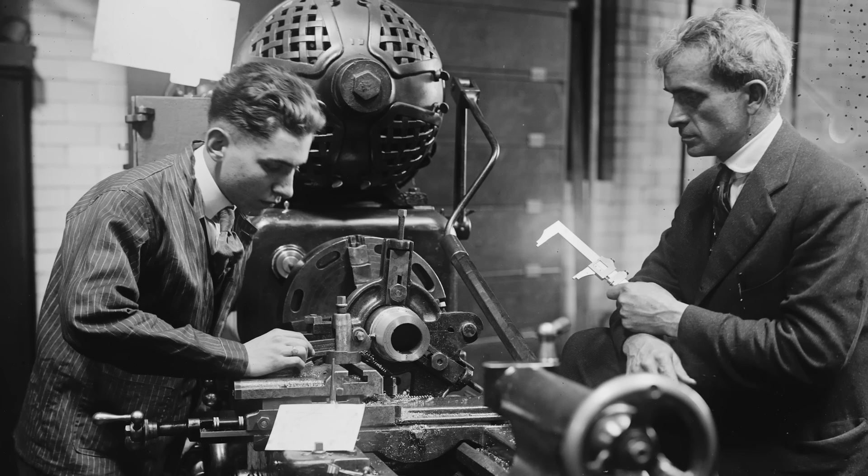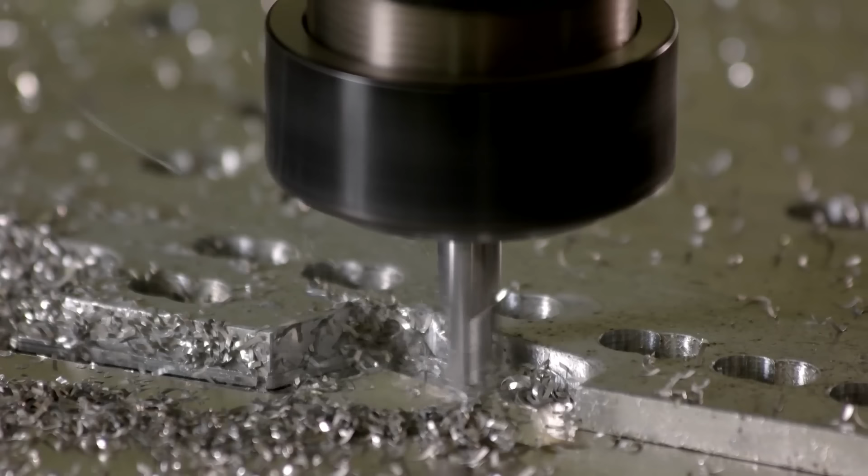The machinist occupies a special place in industry. Using a set of mechanized tools and drawing on years of experience and vibes, they take something from raw metal to finished form. Machining was part science, part magic, a respected craft that brought pride and a good living to its many practitioners. Then, in the 1950s, a revolutionary new technology sought to replace the machinist's capabilities with a string of numbers. One Japanese company arose to take the fullest advantage of this trend.

In today's video, the rise of numerical control, CNC, and Fanuc.

Machine tools are power-driven tools that work metal. There are a variety of them, generally classified into two categories: machining and metal forming tools. Machining tools remove metal from the workpiece in the form of tiny chips. A common example is the lathe, which holds and spins the metal workpiece at high speed while a cutting tool moves around it, cutting it. Another important one is the milling tool, the lathe's conceptual inverse. Here we have a fast rotating cutting tool, and this time it is the workpiece moving around the cutting tool, shaving off tiny chips.

The second major category are the metal forming tools. These units shape metal without removing any of it, most often via deformation, bending, pressing, etc. Such machine tools include forging presses and hammers, hydraulic presses, and so on.

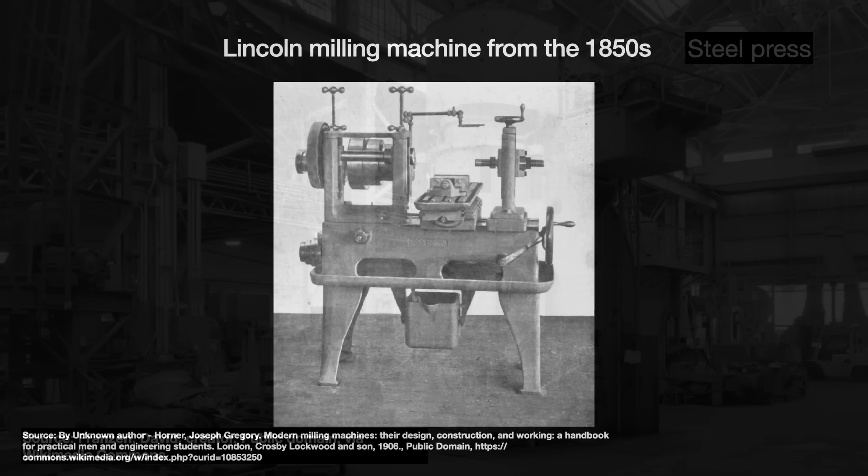Many machine tools first emerged in the United Kingdom and the United States in the mid-1800s for the production of, what else, weapons of war. But the technology and techniques quickly transferred to making sewing machines, bicycles, automobiles, turbines, and the like.

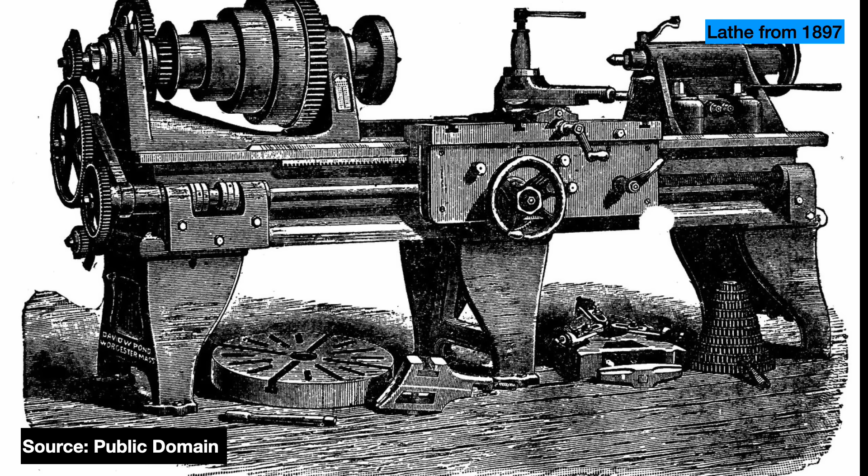Measured by output, these machine tools are nothing. In 1986, the whole American machine tool market was valued at just $2.7 billion, less than the American paper bag industry. But these tools play an outsized role in industrialization. Every manufactured item is either made by a machine tool or by a thing made by a machine tool. Let us give them the proper respect they deserve.

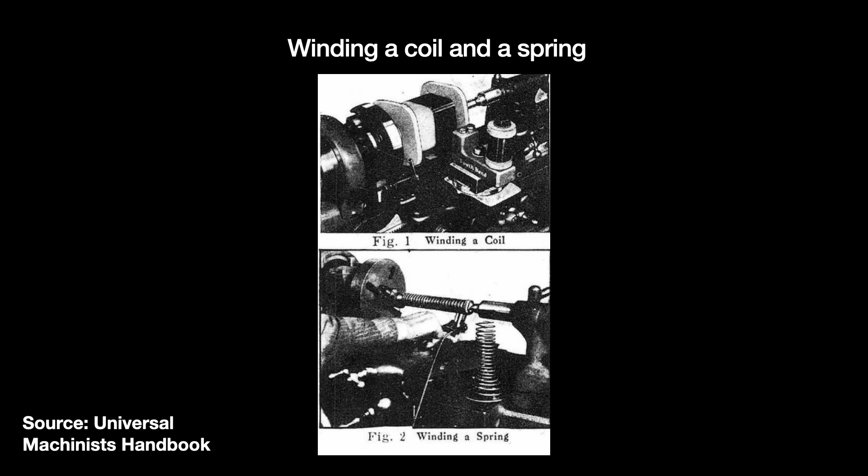For many years, these machine tools were manually operated. It was demanding precision work done by skilled machinists in machine shops, part art, part science. The machinist has to know advanced math, like algebra and trigonometry. They have to grok metallurgy, how to read technical blueprints. At the same time, all that technical knowledge must be augmented with experience, judgment, and just plain feel. Like an artist, they must envision the part before they can go machine it. Such skills must be learned in a real machine shop over many years under apprenticeship.

Machining makes the machinist a key participant in the process. Even if someone else came up with the idea, they must still defer to the machinist's experience. Such control and skill was something that the machinists were very proud of.

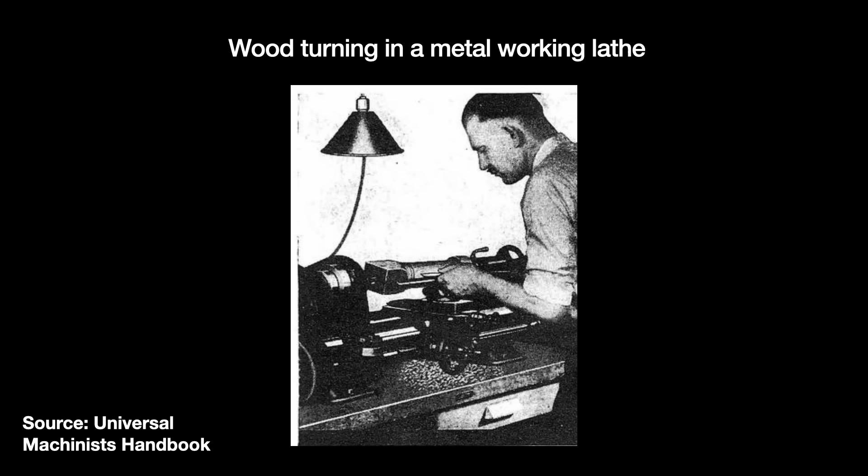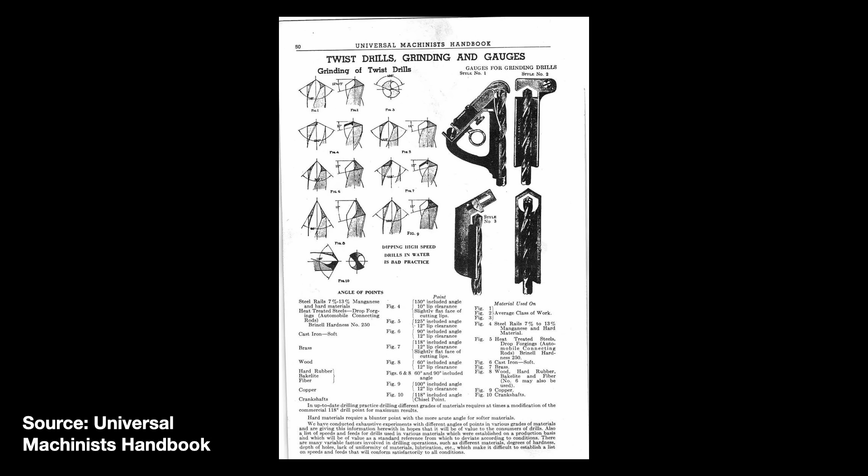Over time, however, industry has demanded increasingly complex and intricate metal shapes. But with there only being so many skilled machinists, it became difficult to produce identically precise machine parts at scale. Was there another way? Thus, the idea of an automatic module, quote-unquote, controlling the machine tool as if it were a human operator.

In 1946, General Electric and the Gisholt Machine Company adapted gunfire control technology developed in World War II to first, quote-unquote, record a master machinist's motions on a milling machine using sensors. The recording is stored onto magnetic tape and then played back with the hope that it can be reused to make many identical parts at scale. It was clever, but ultimately failed. One reason being that the recording was analog, a continuous waveform essentially, so that recording can't be easily edited, and over time, distortions in the tape's quality caused accuracy to drift.

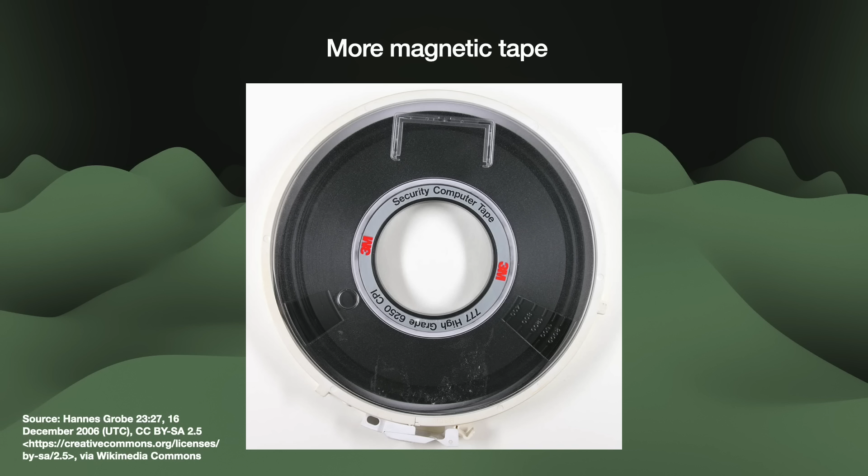Legacy-wise, this particular machine is perhaps most well known today, if at all, for inspiring writer Kurt Vonnegut's debut novel, Player Piano.

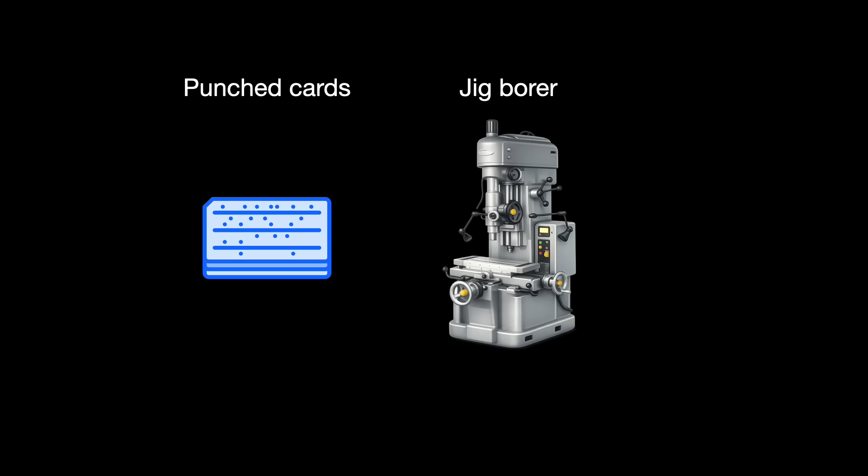In 1948, MIT got a call from an industrialist named John T. Parsons, founder of the Parsons Corporation. Parsons ran a company making helicopter rotor blades for the Air Force, and this required operators to drill hundreds of holes using a machine tool called a jig borer. To reduce operator error, he figured out how to couple a computer to that jig borer so that you can feed it a series of numeric instructions stored on punch cards, coordinates and tool movements essentially. The jig borer then automatically does the jiggy.

Then the Air Force proposed to build a plane with a special wing where the skin and ribs are made from a single piece of metal.

Parsons questioned the recommendation on how to achieve that. He felt that if he could wire up a milling machine to a computer the same way he did with the jig borer, then it could do better. The Air Force said bet, and offered a $200,000 contract to build it.

So Parsons subcontracted MIT to help execute this idea of a milling machine controlled by a string of numerical data on paper tape. In 1949, Parsons, MIT, and the Air Force signed that contract. The Air Force provided a standard Cincinnati Hydrotel milling machine to modify. MIT researchers William Pease and James McDonough led the project.

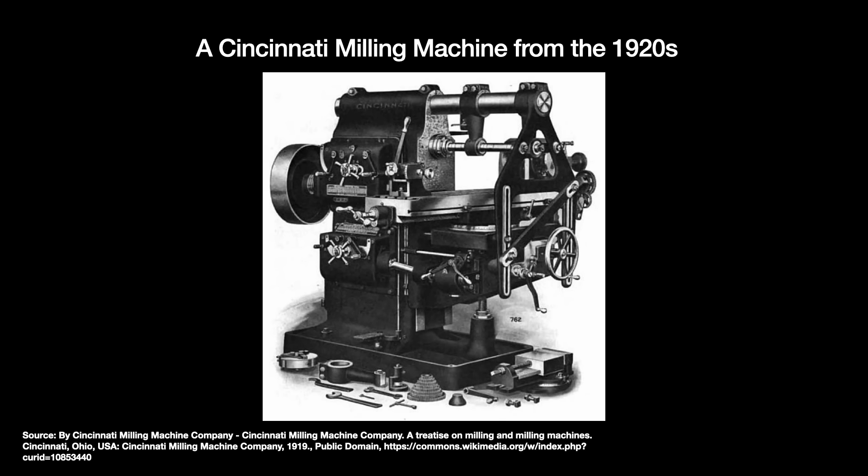The development process was difficult. It took MIT a year to come up with a design that Parsons approved of, and during the build there was huge conflict. Parsons, being the industrialist he was, wanted as few modifications as possible to the Hydrotel milling machine. More modifications raised the budget and made the tool harder to operate.

But MIT was used to working in a military R&D context, where budgets are a secondary concern. And researchers, being researchers, envisioned their project as more than just commercializing an idea - that was just boring. Rather, they saw themselves as tackling the general problem of crafting shapes out of metal. So they replaced the milling machine's conventional controls entirely with 3 hydraulic servos, each capable of receiving separate commands and allowing movement in 3 dimensions. This wayward intellectual exercise apparently, and rightly, drove Parsons nuts.

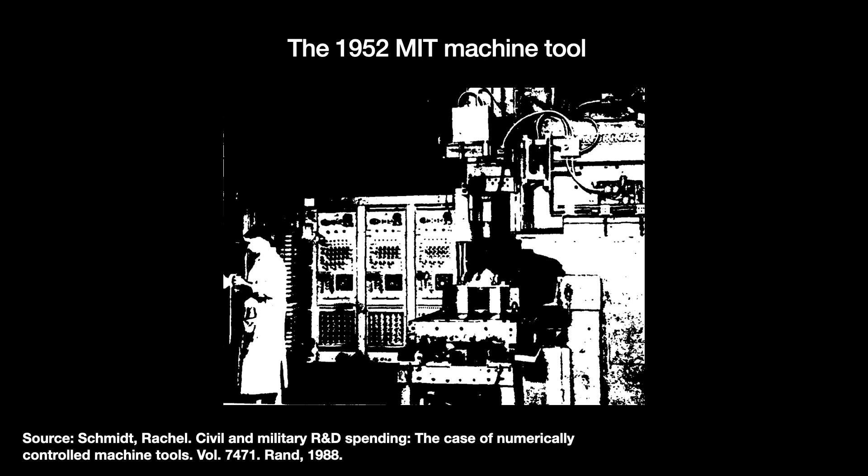After 6 months, the project was just 30% done, but costs had ballooned to over twice the originally projected budget. Financially strained, Parsons withdrew, though he did receive co-authorship on the patent. But the Air Force stepped in, and with their help, the tool was completed 6 months later in March 1952.

Today, we consider the 1952 MIT machine a pioneer. Newspaper articles at the time dubbed it a mechanical brain. In an interview, project leaders Pease and McDonough said that their technology, which they named numerical control, represented a small step towards a new industrial revolution.

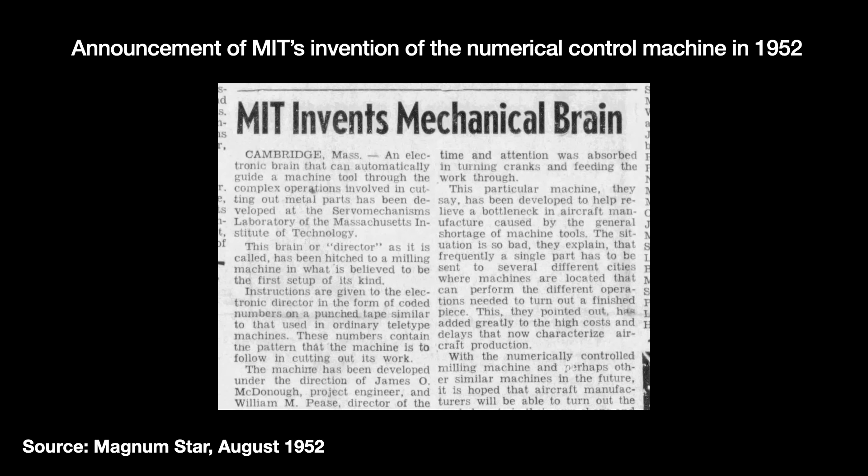After the announcement, MIT held educational seminars and demos to promote numerical control technology to American tooling and aerospace companies. Unfortunately, the reception, especially from the tooling companies, was not that great. A History of the Lab by Kyung-Soo Paik quoted Brown recalling that the demo made one of the manufacturers so mad that he wrote MIT's president, protesting the university wasting resources on such a boondoggle.

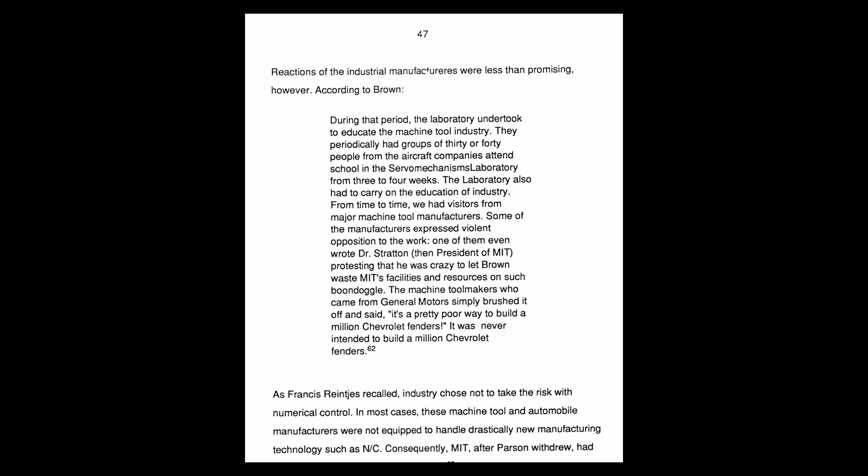Some tool makers from General Motors who saw it brushed it off, saying, quote, 'It's a pretty poor way to build a million Chevrolet fenders,' end quote. Many years later, Parsons said that MIT's demonstrations were, quote, 'ridiculous because they didn't know machining,' end quote.

In the end, the Air Force did adopt numerical control in a major way. They went on to fund, at considerable expense, MIT and 5 companies, including Cincinnati Milling and General Electric, to produce NC controller modules, integrated into milling machines for their aircraft factories.

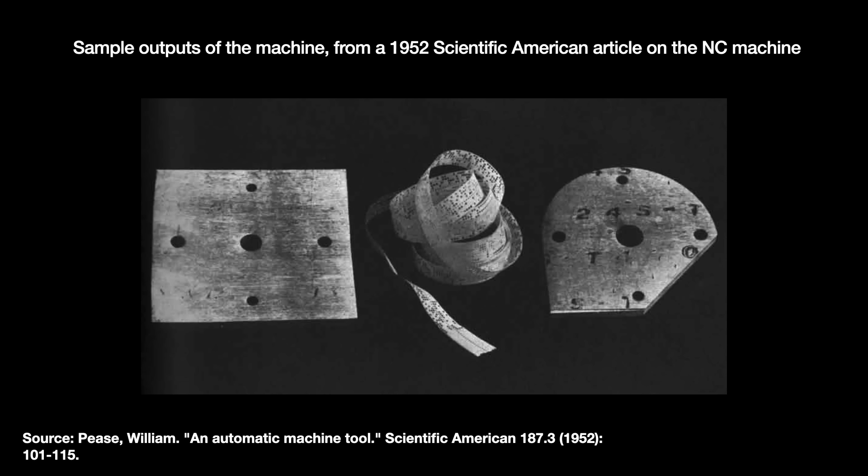Early work was difficult. The modules and their machines broke down frequently on the factory floor due to contamination from electricity, dirt, oil, and chemicals. Operators had no idea how the thing worked and could not fix it. The controller and machine manufacturers frequently blamed each other.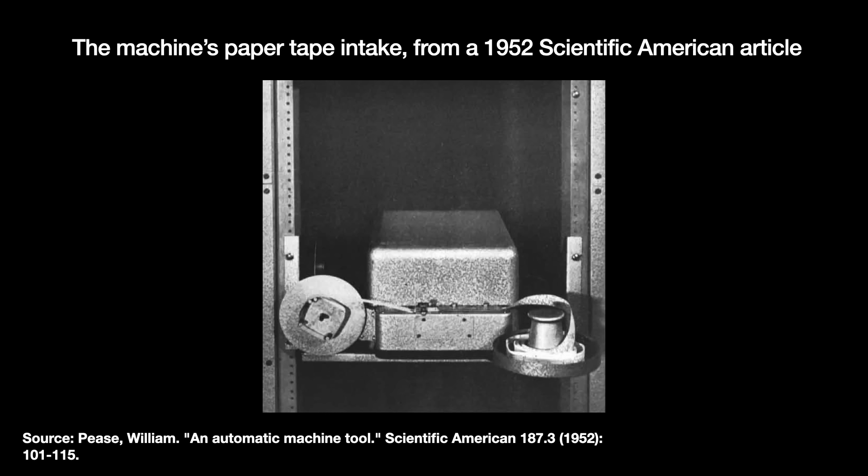The Air Force did eventually get it to work, and the 5 NC controller subcontractors then tried selling their modules commercially. But as none of them cooperated with each other, their systems all worked completely differently. The Air Force had also funded a programming language called Automatically Programmed Tool, or APT, to go along with this NC installation. APT worked and held elegance, but it also greatly contributed to the system's overall costs.

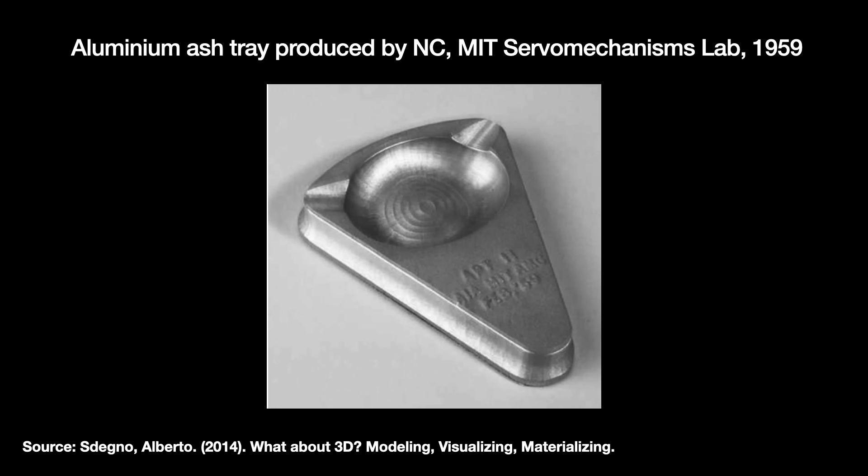Thanks to these efforts, you can say that the United States machine tool industry held a lead in the implementation of NC technology, and there were people, a subset of people, who recognized that NC allowed for certain benefits. However, the long-running connection to the Air Force also left people with the impression that NC was inherently unprofitable without extensive government subsidies - a true double-edged sword.

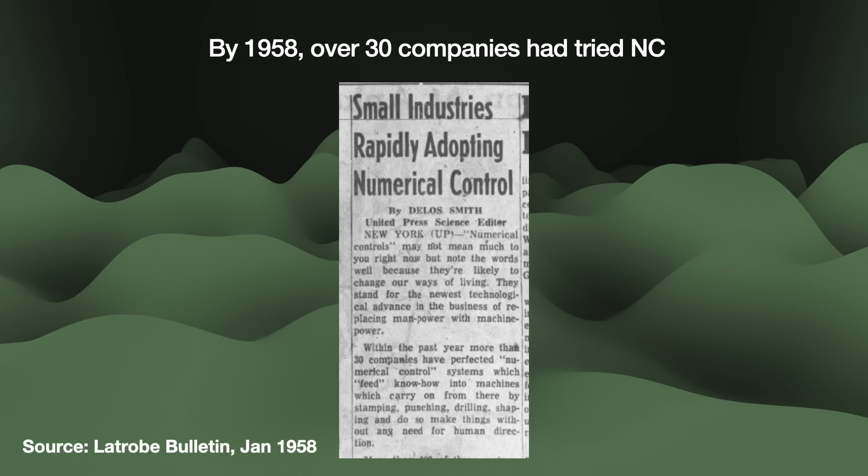But did NC have to be so complicated? Can it be done simpler? Across the Pacific, the news from MIT caught the attention of universities and research institutes in Japan. Soon after the 1952 MIT announcement, work on NC began at the Tokyo Institute of Technology, University of Tokyo, and the Research Institute AIST. This, in turn, motivated the electronics giant Fujitsu to tentatively explore the factory automation space.

They put together a small research team and selected Dr. Soemon Inaba to lead them.

Inaba is described as compact but scholarly looking. I myself might say he's elfish. Born in the Ibaraki prefecture to a long line of village leaders, he apparently spoke Japanese with a noticeably slurring dialect. He studied precision instruments at the University of Tokyo during World War II.

After graduating in 1946, he joined Fujitsu as a mechanical engineer, which made him a bit of an odd duck, because Fujitsu, named Fuji Telecommunications at the time, was more known for computers and telecommunications than mechanical engineering.

Inaba recalled kicking off in 1955 with very little. Quote: 'Development started from scratch, beginning with the acquisition of technical papers from MIT.' End quote. The team then got a fortuitous boost from one of Japan's top machine tool companies.

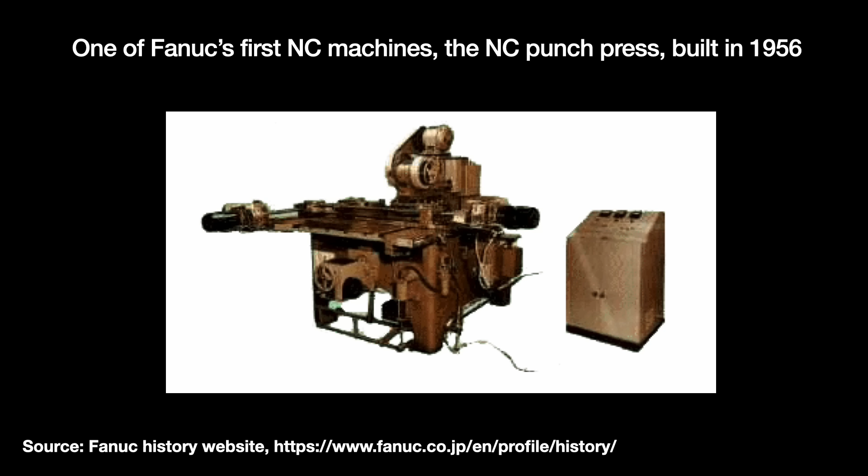Powered by a Sanyo motor and a type of pre-transistor electrical circuit called the parametron, this NC controller module directed a turret punch press imported from the United States. All it did was punch holes into sheet metal, but it was good enough progress to be hailed in the media.

Inaba then turns to making an NC milling machine by the 1958 Osaka Trade Fair. They pull it off, though the tool they demonstrated was not commercially viable.

After the exhibition, Mitsubishi Heavy Industries' Nagoya aircraft factory is sufficiently impressed with Inaba and Fujitsu to commission an NC milling tool for their F-86 fighter jet. Fujitsu, Mitsubishi, and Makino thus collaborate in an all-star event to deliver the first production NC tool in November 1958.

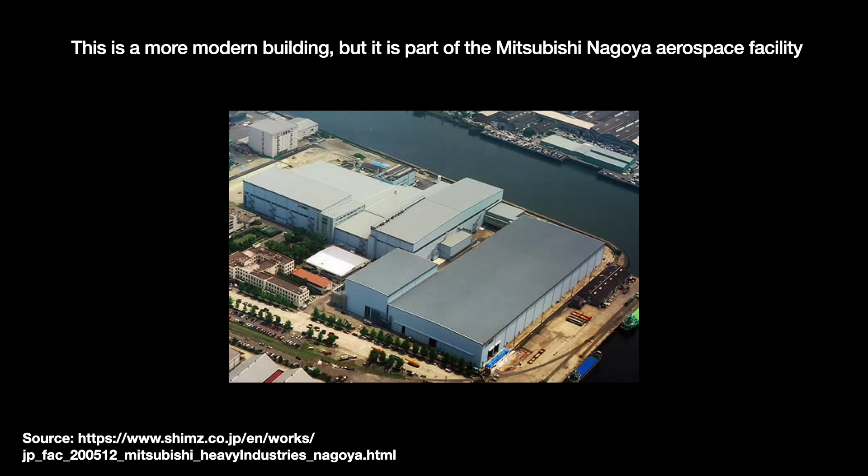This NC tool was just barely competent. It was so sensitive to electric noise that even a motorbike passing by the factory might cause the device to error out, and each month one of its 100 vacuum tubes blew out, which was extremely inconvenient.

In 1959, Inaba and Fujitsu rocketed past domestic machine tool competitors like Toshiba and Mitsubishi with a breakthrough NC-enabled milling machine. At its heart is something called an electro-hydraulic pulse motor.

Inaba invented and patented the motor himself, though he got the core idea from one of Fujitsu's automatic exchange equipment products. How does it work? The name is quite informative.

First, a human interprets the blueprints and produces a list of coordinates for the machine to cut. This is put onto a paper tape, which is fed into a Fujitsu Facom 128 general-purpose computer. The Facom 128 reads the tape and decides the lines and cut paths.

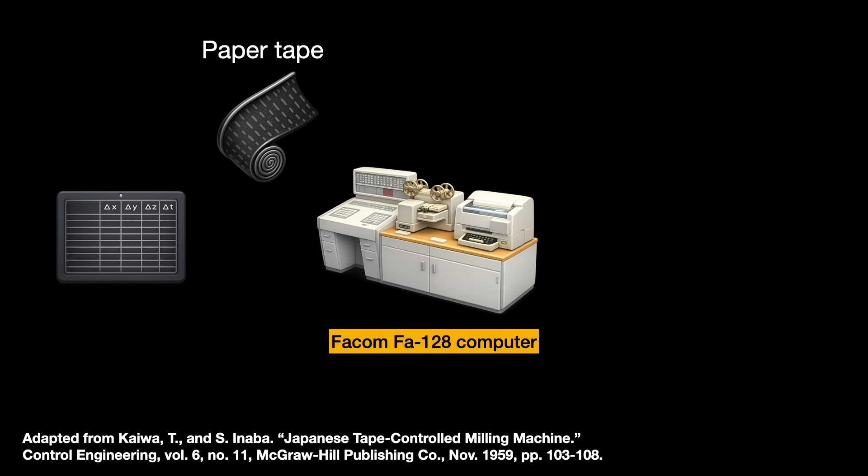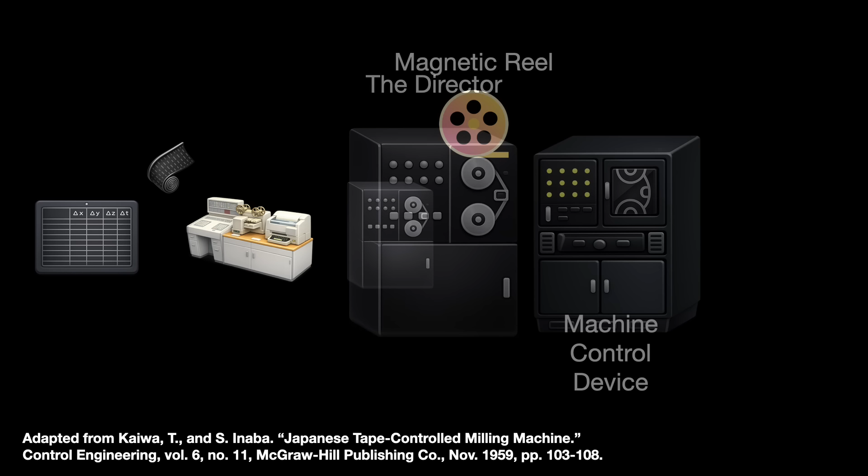Then another thingy called a director translates that information into a sequence of electrical pulses and transcribes it onto magnetic tape. The pulse sequence goes into a machine control unit.

Inside that unit, the sequence controls the flow of highly pressurized hydraulic oil through a special valve. The hydraulic motors thus move a heavy piece of metal along the cutter in a certain direction. Slowly, the pulse sequence allows us to cut the metal into the desired shape.

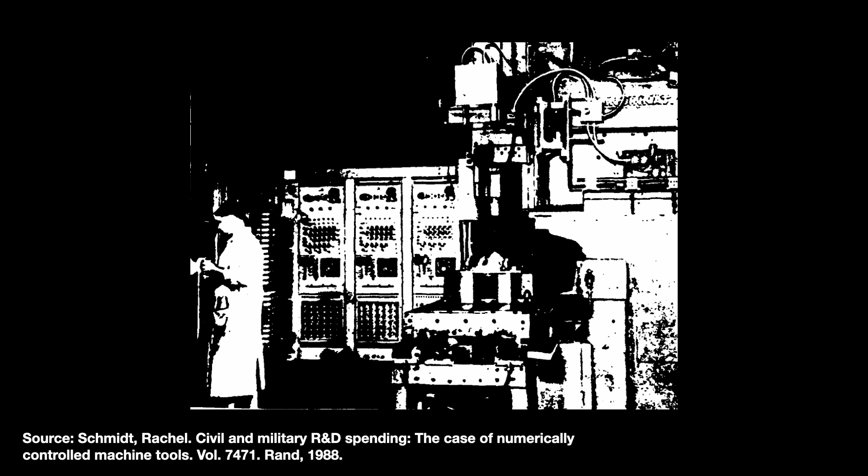Inaba and his team intentionally designed their tool to be simple but practical. For instance, the 1952 MIT machine ran on a closed feedback loop, meaning that it read and responded to its own real-world results, which was technically nifty, but probably contributed to its high cost and impracticality.

The Fujitsu machine, on the other hand, was largely open loop, like a fancy player piano that carved metal rather than jam out Scott Joplin's The Entertainer. This stripped-down version of NC was key in allowing the module to survive factory floor conditions, and it went into the market in 1960.

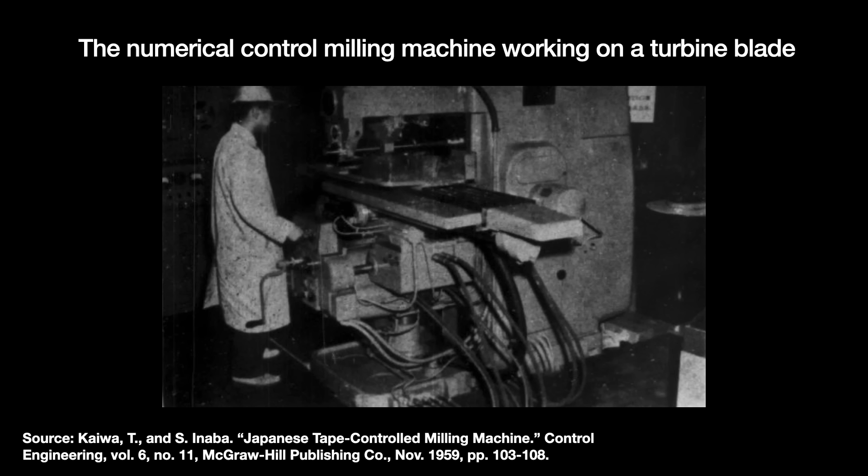After this first success, one might expect Fujitsu to further pursue the machine tool space, but Inaba instead decided to focus his company on only the NC controller technology, partnering with the Japanese machine tool companies rather than competing against them.

Their first open-loop NC controller module, the Fanuc 220 — Fanuc stands for Fujitsu Automatic Numerical Control — released in 1960, but it struggled in the market. Why? Well, first, it cost about 10 million yen, which was more than the tool itself. Second, it also needed human operators to manually tweak the whole pulse sequence to accommodate variance between tools.

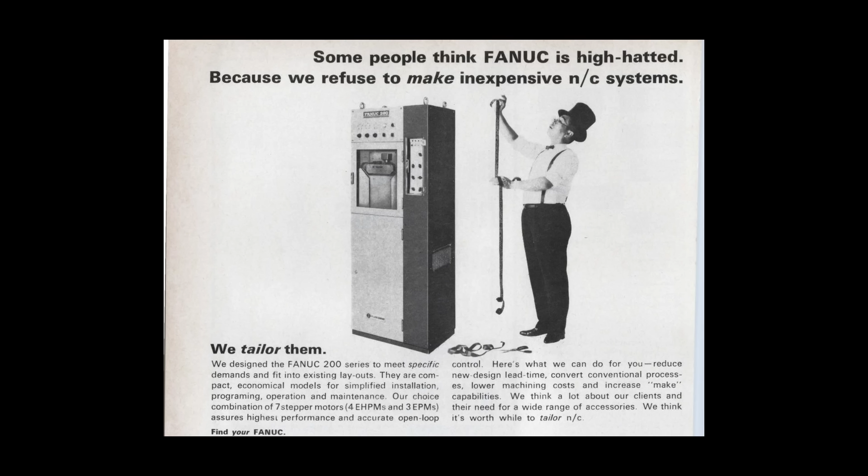Makino suggested an offset function that allowed operators to quickly make lasting offsets to fix any tool variance errors. They also suggested removing a curvilinear processing feature and replacing it with a straight line feature to make it cheaper.

This feature deletion, as well as transistorization, let Fujitsu price the Fanuc 260 controller module at 2 million yen, just a fifth that of the Fanuc 220. Sales surged from 60 units in 1965 to 388 in 1968.

Back in the United States, one of the key drivers of NC adoption was the rise of the machining center throughout the 1960s. An early machining center was Kearney and Trecker's Milwaukee-Matic Model 2. This $145,000 tool was equipped with a cutter, rotating horizontal table, and an automatic tool changer.

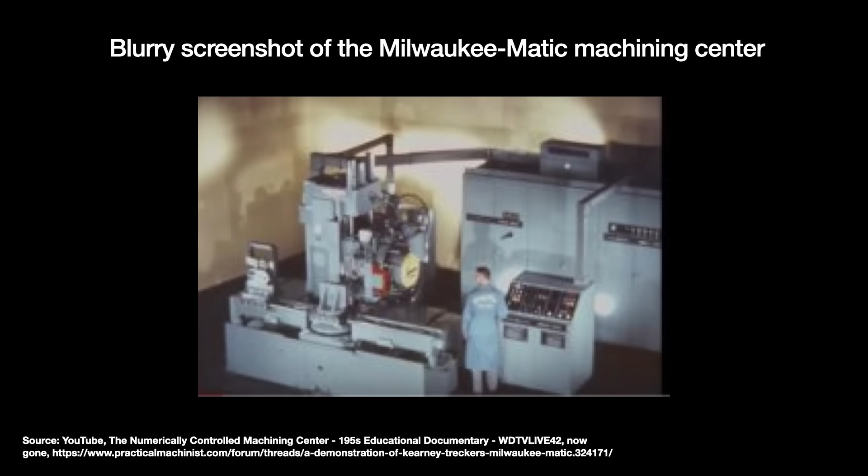This tool changer was a rotating drum holding about 30 tools. When needed, an arm can go and equip itself with a new tool from the drum in about 9 seconds. Such fast, precise movements can only be performed using numerical control.

The NC-powered machining center consolidated multiple machining functions into one: drilling, milling, boring, tapping, reaming, and some lathing, though not too well. An entire production center in one.

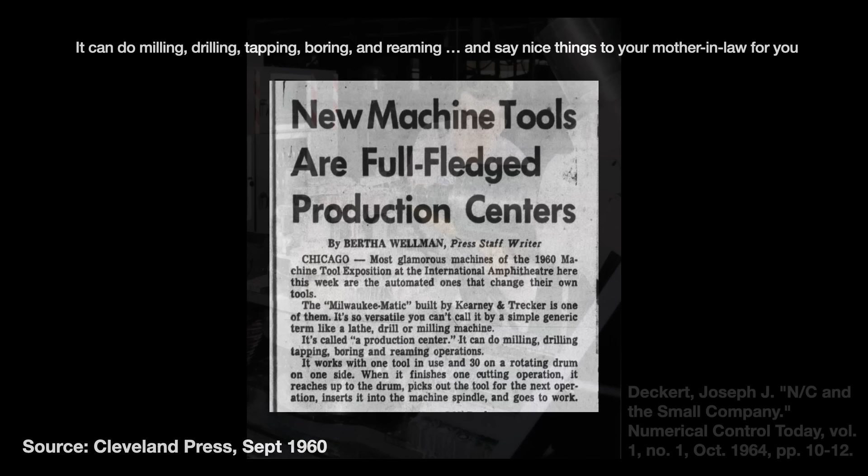The American machine tool industry for decades led the world, and for all those decades, it thrived on machine tool makers building different tools, knowing that they did different things and that machine shops are going to buy all of them. But NC-enabled machining centers leveled and reshaped the playing field, ending niches that once existed in milling, boring, drilling, what have you. So those guys rushed to build their own machining centers, driving NC module adoption and forcing themselves to compete mano a mano in an increasingly crowded space.

But making a good machining center requires new competencies in complicated areas like control theory and electronics. The Japanese tool makers just bought from Fanuc, but many of the American companies tried to roll their own solution with varying amounts of success.

In the mid-1960s, a slowdown in the aerospace industry combined with tightening credit causes the cyclical machine tool industry to crash hard. Sales declined 50 to 60% between the 1967 peak to 1971.

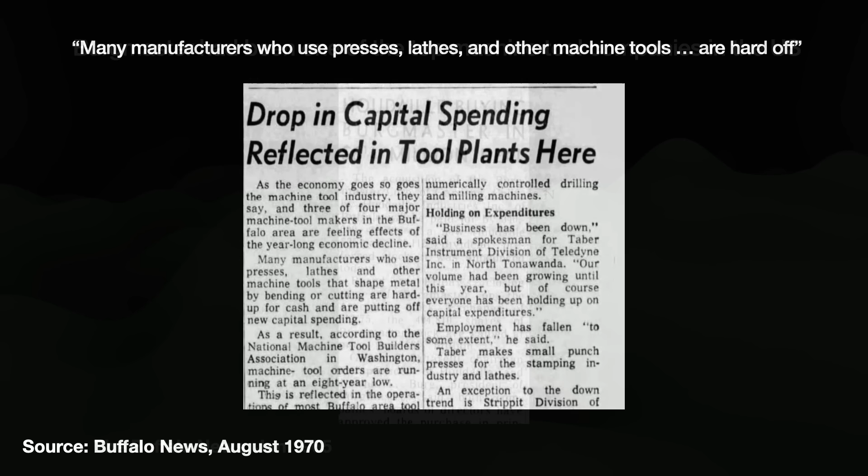This opened the door for financial conglomerates, private equity essentially, to go in and start buying up and merging together these small machine tool businesses. This was detailed in the wonderful book When the Machine Stopped, written in 1989 by Max Holland.

Backed by Wall Street money, these conglomerates paid more than any other machine tool firm, yet they lacked knowledge or even interest about the machine tool industry itself. Companies like Burgmaster often sold thinking that they can tap pools of cash to fund more products. But it turned out that the conglomerates simply wanted to milk the old cash cow so that they can go buy the next big thing.

This starved the U.S. machine tool companies of cash that could have been reinvested into the business, particularly to adopt numerical control. By 1970, global machine tool export share held by American firms declined to just about 15%. The export leader those years was Germany, with about 30% market share, aided in part by Siemens aggressively adopting NC as well as a favorable exchange rate.

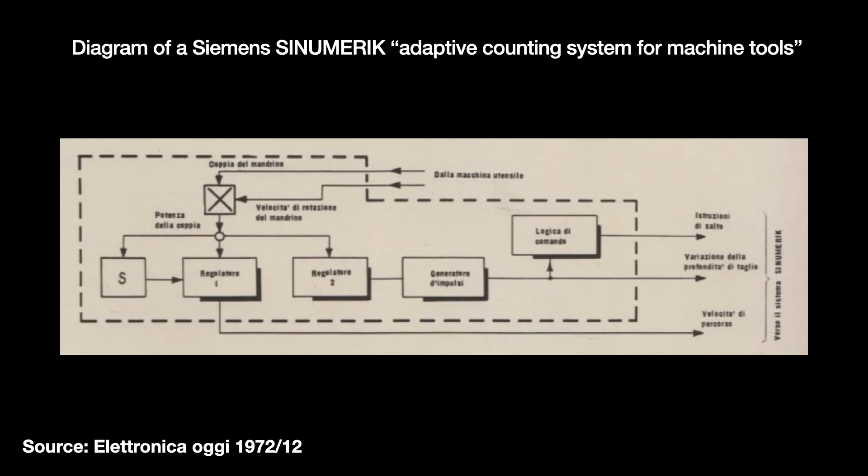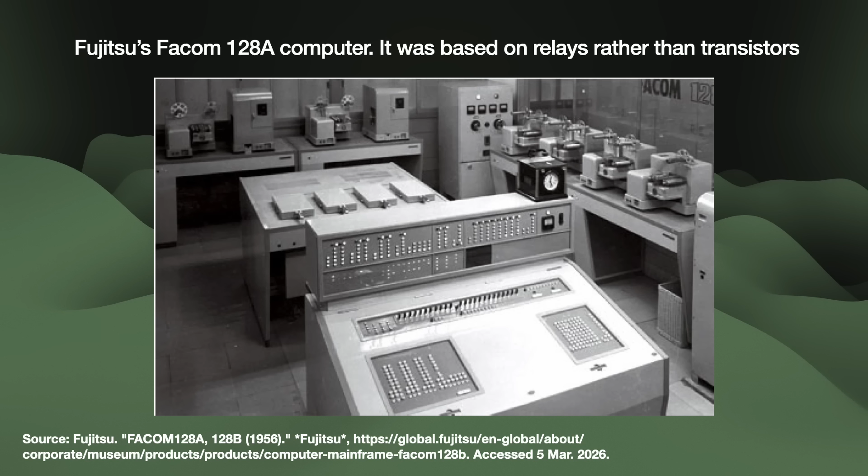Fujitsu's NC division did not turn a profit until 1965. They could not have survived the hard early years alone, not only because of the financial support from the Fujitsu giant, but also access to the products of Japan's top computer maker.

But by 1971, Fujitsu now controlled 80.7% of Japan's NC market, its peak market share. And since NC units earned high margins, the resulting profits were very good.

Fujitsu could have kept those profits for itself, funneling cash into increasingly expensive computer R&D or other financial things like what the American conglomerates did. Instead, Fujitsu decided to spin off the NC division into its own company.

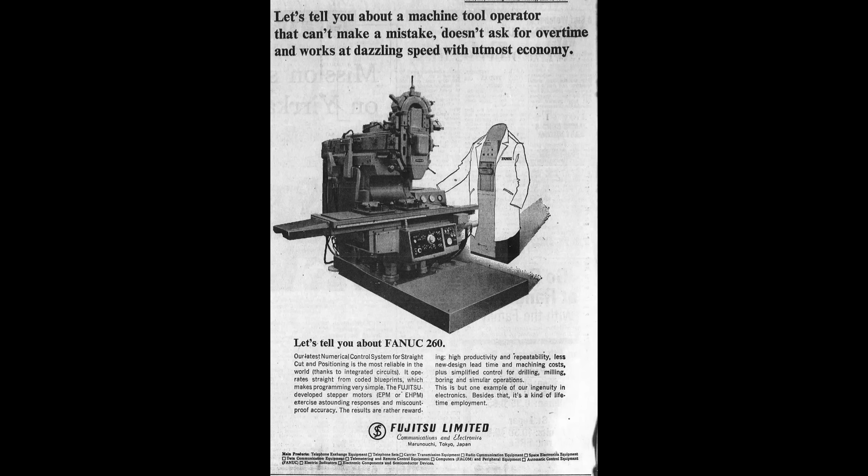The parent kept 52% of the shares. Fuji Electric and Germany's Siemens each got 6%. The latter company got shares due to a cross-licensing agreement. The rest of the shares floated on the open market.

Inaba, of course, led the newly independent company and would do so for decades. As a businessman, he was a savvy but demanding, dare say tyrannical, leader known for a love of R&D and alcohol, though in his later years he apparently gave up drinking for health reasons.

He was also a bit quirky. For example, he insisted on being referred to as Doctor of Engineering, and he demanded that all of his workers, including himself, wear yellow, and that all his products be colored yellow, because yellow is the emperor's color or something.

You can imagine the NC controller unit as having a quote-unquote brain, which is its computational component, and quote-unquote muscles, its servo motors. Together, they guide the machine tool.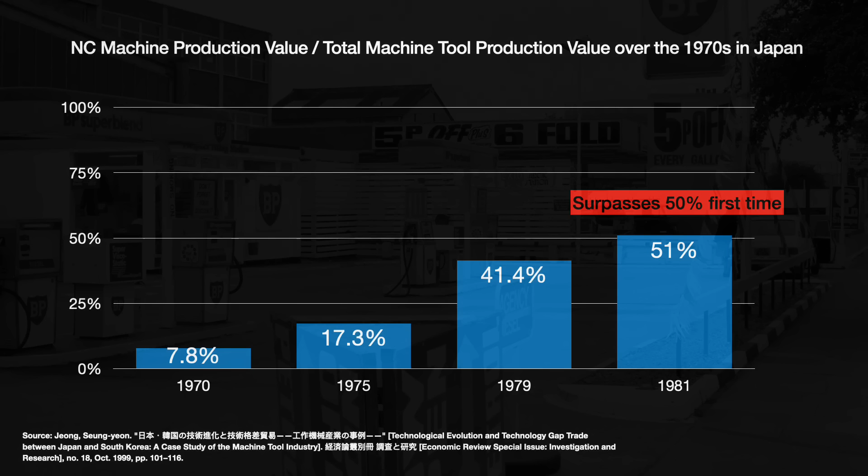In the 1970s, both of these underwent substantial changes. In 1973, Japan was hit by the first of the 1970s oil crises. With rising inflation and pricier energy costs, Japanese machine tool customers sought higher precision, greater efficiencies, and lower labor costs. NC became a way to reduce setup time, scrap and rework, and operator labor hours. For instance, it allowed Toyota and Honda to manufacture 20 to 30% fewer parts than their American car counterparts.

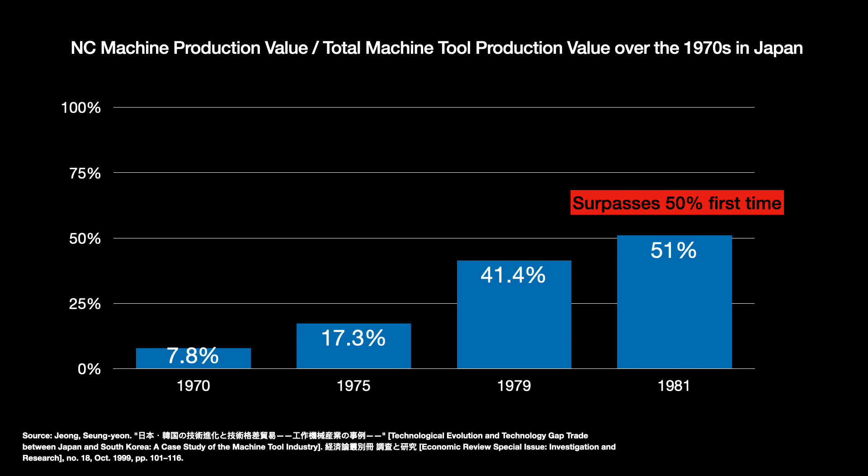But as this happened, it started to become clear to Fanuc that its original open-loop electro-hydraulic pulse motors were not meeting customer needs. For one thing, it used a lot of oil and power, two things that got very expensive after 1973, and hydraulic systems were proving too awkward for precision work. By comparison, direct current electrical motors were rapidly improving thanks to the introduction of a game-changing solid-state electrical valve called the thyristor. Yet Fanuc owned this pulse motor space.

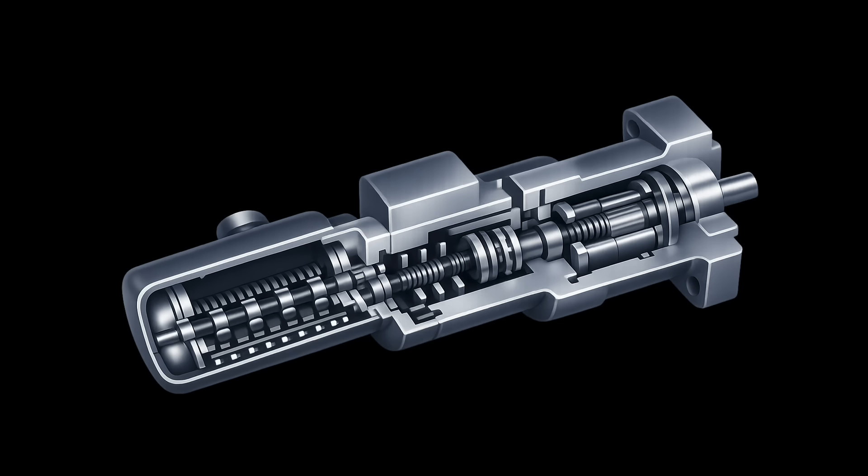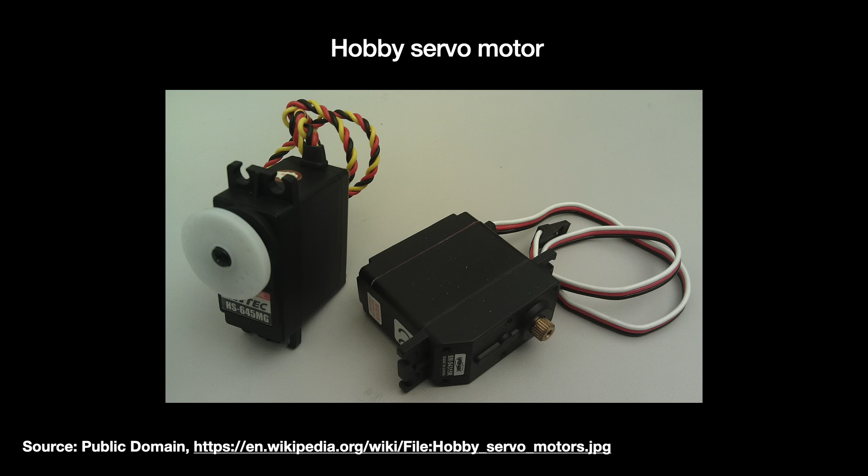They basically invented it, and the patents protecting it were a key competitive advantage. Inaba even once told a friend that to have it taken away from him would be like taking away his own life. But it had to be done. To manage the transition, he took a dual track, ordering development on an electric pulse motor that did not use oil, as well as partnerships for direct current servo motor technology. When the former proved to be extremely noisy, he went to the latter with no sentiment.

In mid-1974, Fanuc struck a licensing deal with a small American firm in Wisconsin called Gettys Manufacturing for their closed-loop electrical DC motors. The first electric motor-based NC tools hit the market in September 1974 and were a revelation.

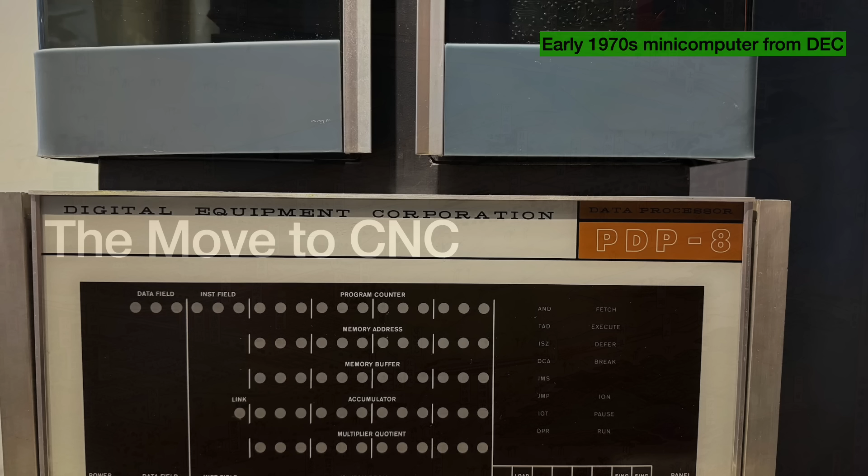But it was the controller module's brains where Fanuc made the greatest impact. NC systems use hardwired logic systems that were not all that flexibly changed. But the emergence of the mini-computer in the early 1970s made possible NC systems that were quote-unquote soft-wired, meaning a programmer can first create and edit the machine instructions inside a digital computer, then feed them directly into the machinery without the use of paper tape or any of that. They called this computer numerical control, or CNC.

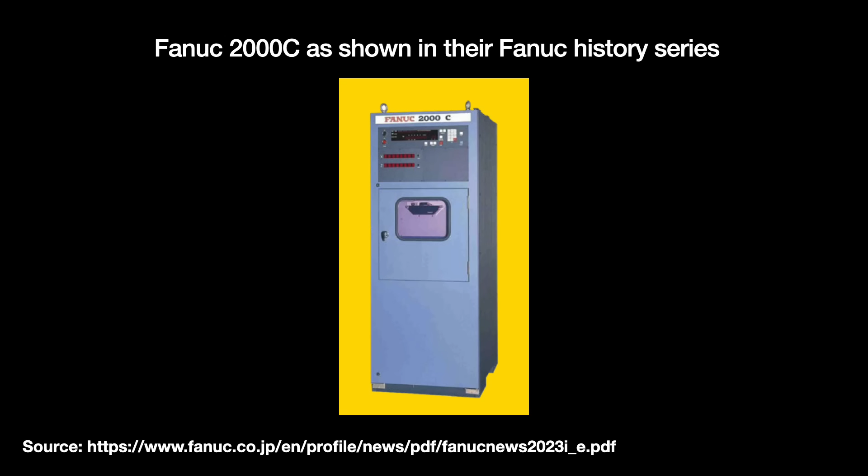In 1972, Fanuc introduced the Fanuc 2000A, their first CNC device. Three years later, in 1975, Fanuc integrated one of Intel's early 8-bit microprocessors to produce the Fanuc 2000C. This model suffered some reliability problems early on, but it showed the way.

This finally led to the company's game-changing 1979 product, the System 6. Powered by the 16-bit Intel 8086 microprocessor plus a cavalcade of custom LSI chips, the System 6 reduced discrete components by 30%, which made it cheaper to produce and sell.

Fanuc enhanced the line further by making it modular, making it easy to integrate the System 6 into a wide variety of machine tools from lathes to machine centers and beyond to get CNC capability, in doing so turning it into the industry standard.

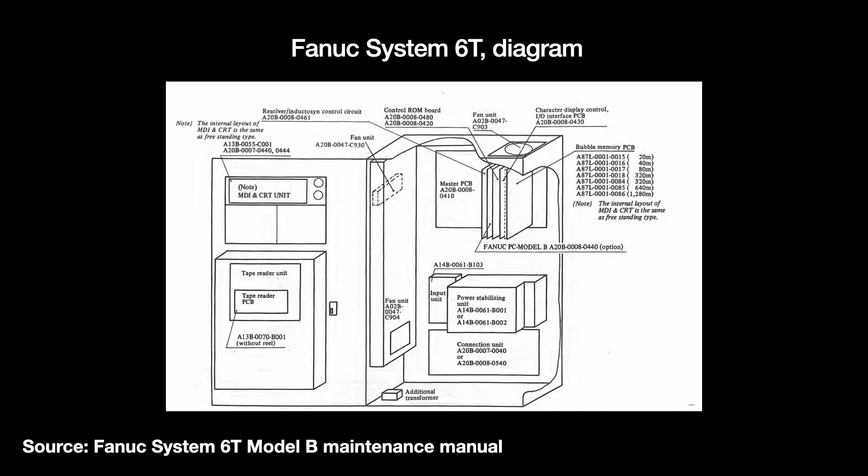Low-cost Fanuc CNC modules armed a rabble of Japanese machine tool makers, enabling them to flood the world market. Thanks to them, Fanuc entered the 1980s as Japan's, and perhaps the world's, leading maker of CNC controllers with over 50% market share.

As early as the 1960s, people argued that NC would de-skill the workers in machine shops, turning them into low-paid peons, while management further centralizes its grip over the means of production. Research on this notion over the following decades, and the transition did indeed take decades, paints a nuanced picture. There are entire theses on it, so I'm not going to try to get into it all, but generally speaking, the individual machinist's job did not de-skill as originally feared, but it did indeed change.

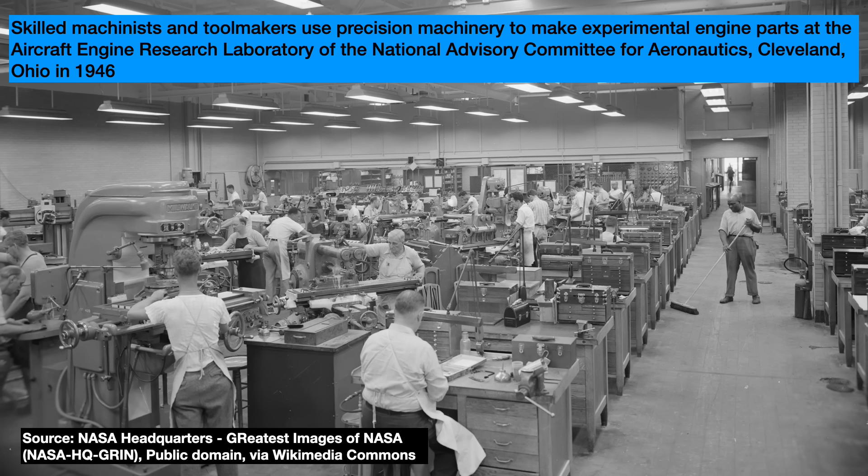Operators no longer exert intricate and complicated physical effort to craft something out of metal. But after the NC revolution, operators now oversee expensive, highly complicated systems that break down in complicated ways. Fixing and keeping these systems online becomes a new, valuable skill, one more intellectual and conceptual than its priors. And considering the surge in productivity it leads to, it pays, probably, most likely, better. That being said, we do lose that sense of self and pride from literally making something with our hands. I think that does mean something.